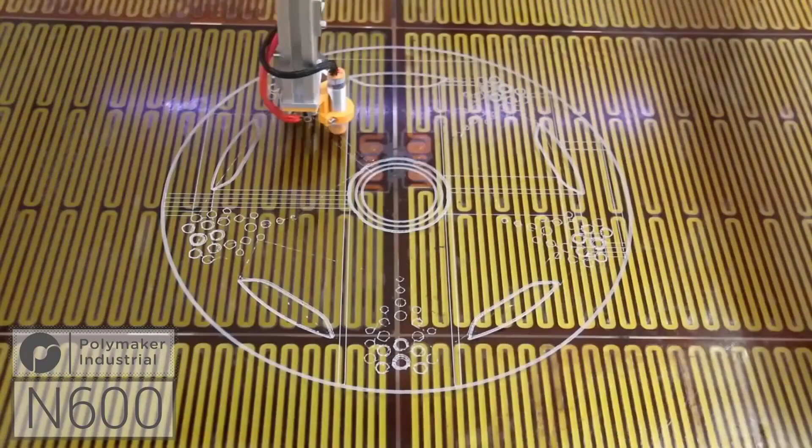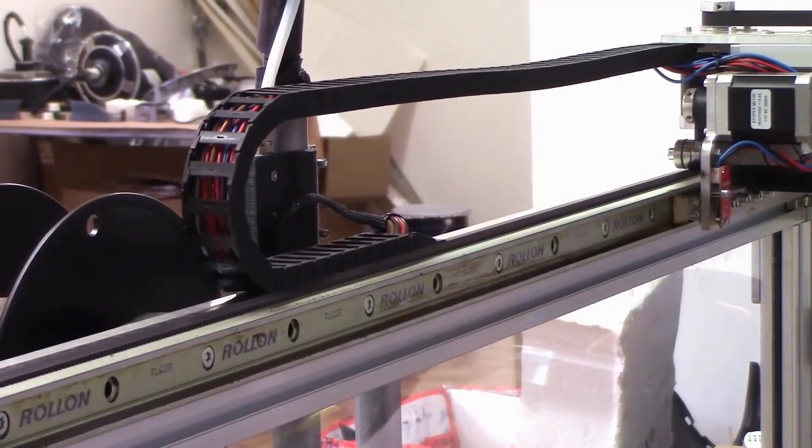There is no wonder 3D printing is making a huge buzz in the world of architecture, design, and engineering. But did you know you can drive 3D printed cars? Italian electric car company XEV and 3D printing company Polymaker have launched the first mass producible 3D printed electric car in the world. This new vehicle, named LSEV, is more about how 3D printing technology brings revolutionary changes to the automotive manufacturing industry, how it could be the milestone product in the adoption of 3D printing into mainstream production of vehicles.

XEV is the first real mass production project using 3D printing. There are also a lot of other companies who use 3D printing for production, but nothing can really compare with XEV in terms of size, scale, and the intensity.

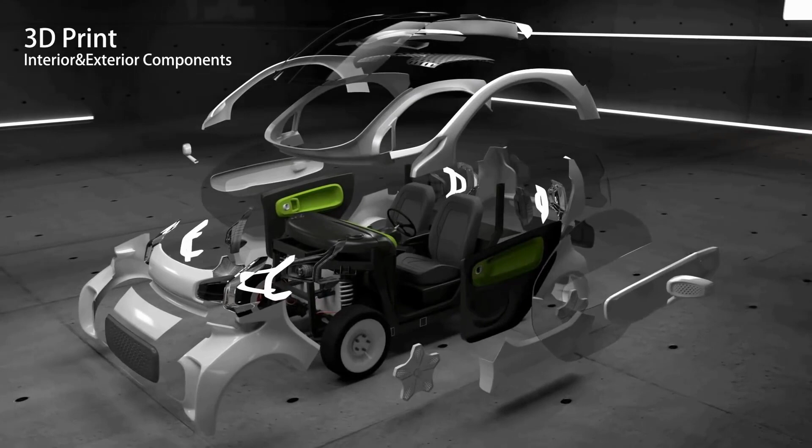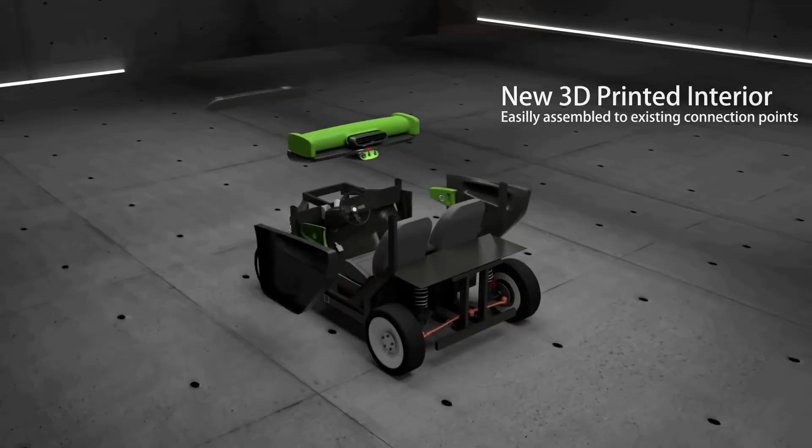XEV has decreased the plastic parts and number of components in a car from more than 2000 to a mere 57. And the finished LSEV electric car weighs only 450 kilograms, which is much lower than similar sized vehicles usually weighing between 1 to 1.2 tons.

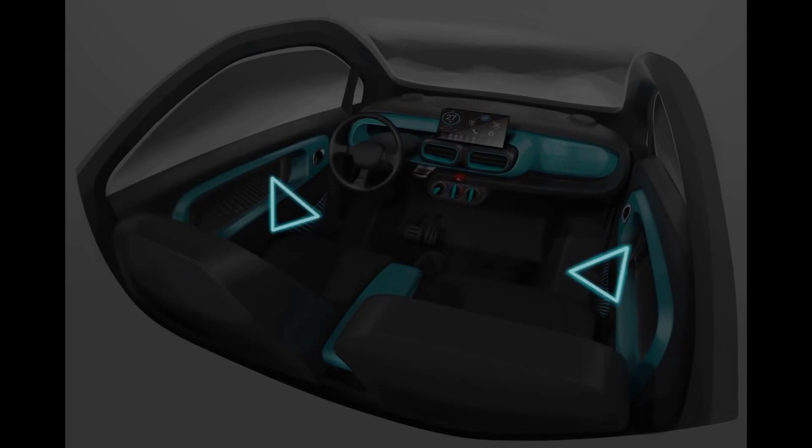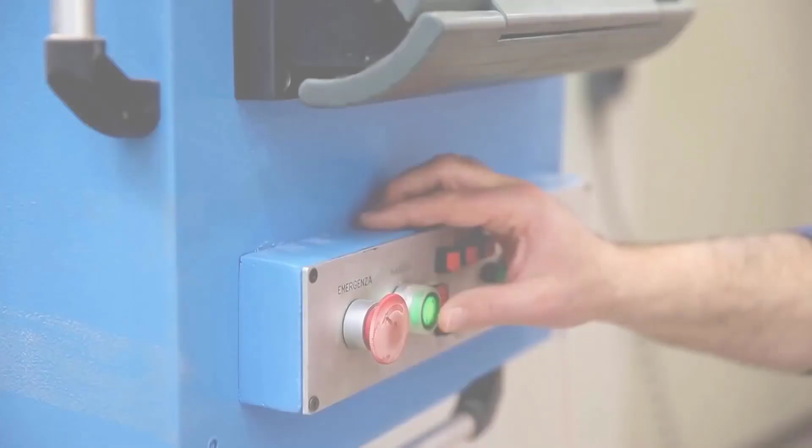Claiming to be the world's first series of sustainable, mass-produced 3D printed cars, LSEV is composed of only 57 parts. It is priced at $7,500 US. The 3D printed car presents an affordable solution for city drivers.

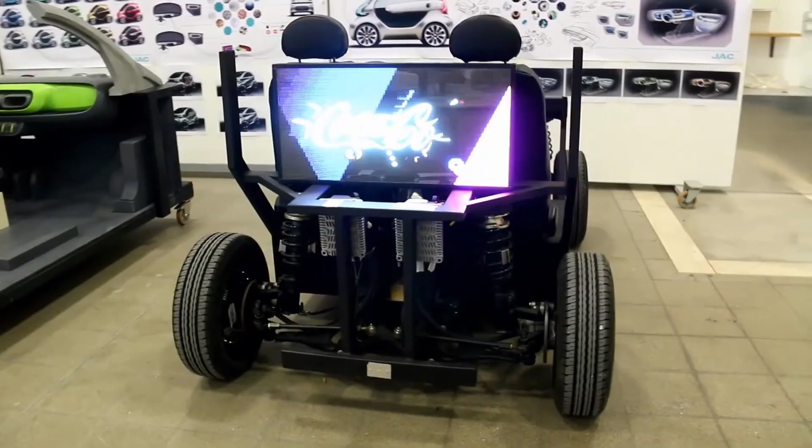Although you would expect that 3D printed cars could offer very limited options, LSEV allows drivers to reach a speed of 43 miles per hour, and each charge allows drivers to cover a distance of 93 miles. However, it is still considered a low-speed vehicle.

The two-seater LSEV's chassis, seats, and glass components are the only visible parts which are not produced with 3D printing. XEV states it takes just 3 days to build one car, including printing components and assembly. The 3D printing materials include enhanced nylon, polylactic acid, and rubber-like thermoplastic polyurethane, called TPU.

This switch of production leads to more than 70% reduction of investment cost in comparison with the traditional production system. Currently, the company plans for the first LSEV deliveries to customers in Europe and Asia around April this year. XEV reports around 7,000 orders for this tiny electric car, with most customers residing in countries in Europe.

Although its 43 miles per hour top speed won't put the LSEV on the highway, it will most likely see service in urban or contained community areas.